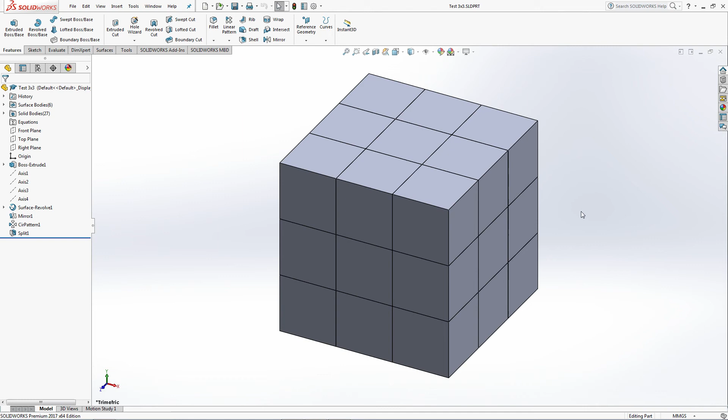So I have a test 3x3 right here, and this 3x3 is fully functional. I mean, I don't have any tolerances or fillets or anything, but each piece is fully functional. So I'm just going to delete everything. I could do a keep bodies, but I'm just going to do delete bodies.

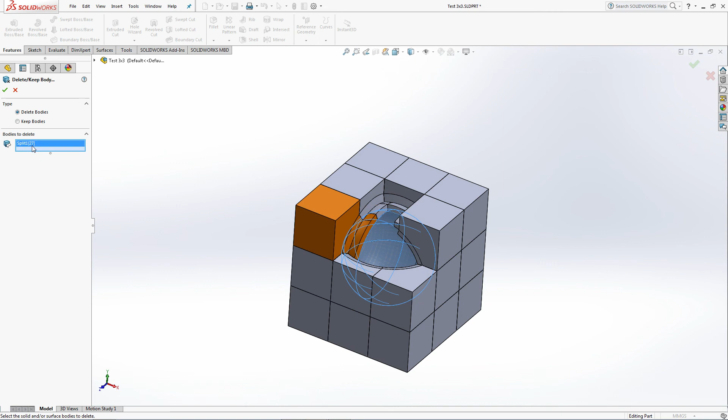Okay, so I'm just left with the four basic pieces of a 3x3. I will go save as STL. This one is the corner.

In Part Stacker, you always want to do dot, however many there are going to be in the puzzle. So there's 8 corners, and there's 12 edges. There are going to be 6 centers, so center dot 6. Great. And then there's obviously only one core, so you don't really have to put dot, you're just going to put core.

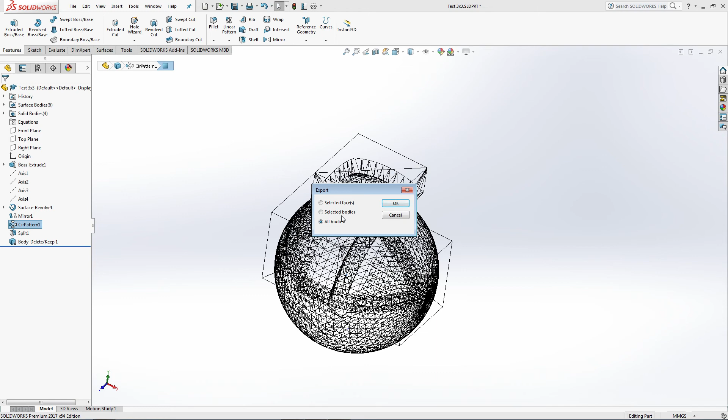Now, you don't really have to do all this stuff, it just makes it easier once I go into Part Stacker, which is where I'm going to go right here. So I'll import these 4 things. If you notice, they all have the dot number at the end of them. And when they open up in Part Stacker, look, 6 centers, 1 core, 8 corners, etc.

So here are the pieces in Part Stacker. I'm using a bounding box of 85 because I've tried this already, and I know that 85 by 85 by 85 works well for this specific puzzle that I made. I will generate the Sinterbox, but I'm going to delete it later, and I'll explain what I mean.

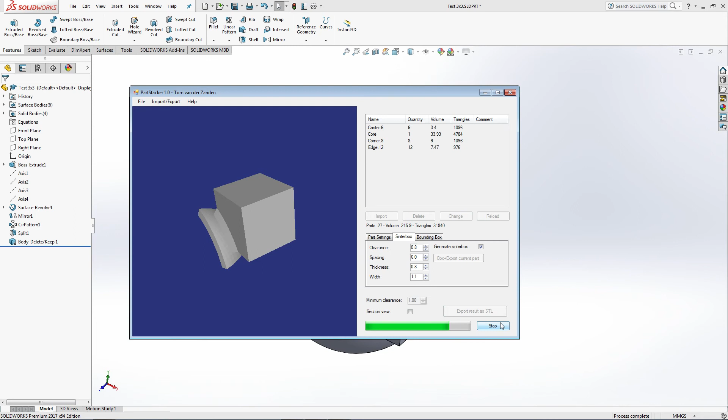So it just packs all these pieces here. Again, if you're watching this video, you probably already know what this is, and I don't really need an explanation, because I don't really see anybody who doesn't know how to design puzzles already watching this video. But that's okay, it's open to anybody if they want to. I just don't see why you'd want to.

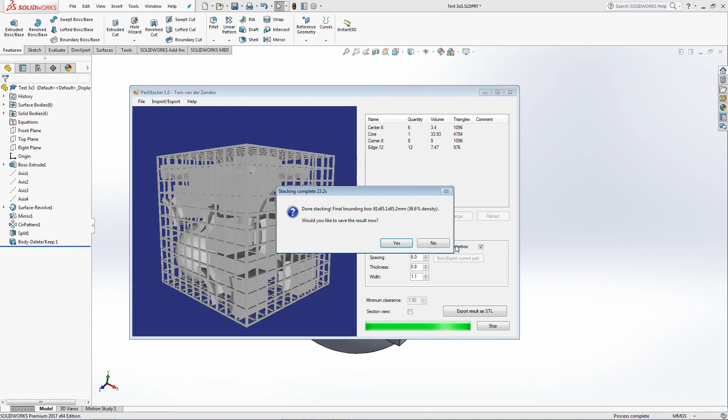So I'll save this as test 3x3 base Sinterbox. Just give a little bit of a descriptive name.

Let's go into, let's actually open this up in MeshMixer, which takes a surprisingly long amount of time to boot up, considering it's MeshMixer. I don't know, maybe it's a more intensive program than I can tell, but it takes as long as Solidworks for me.

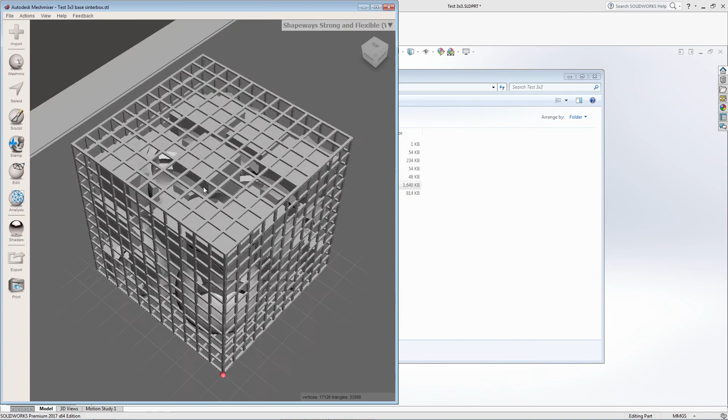So here is the whole puzzle that I just packed. So here's all the pieces inside the Sinterbox. Now, these Sinterboxes are incredible, and Tom Z's program is incredible for making Sinterboxes, but there's an issue.

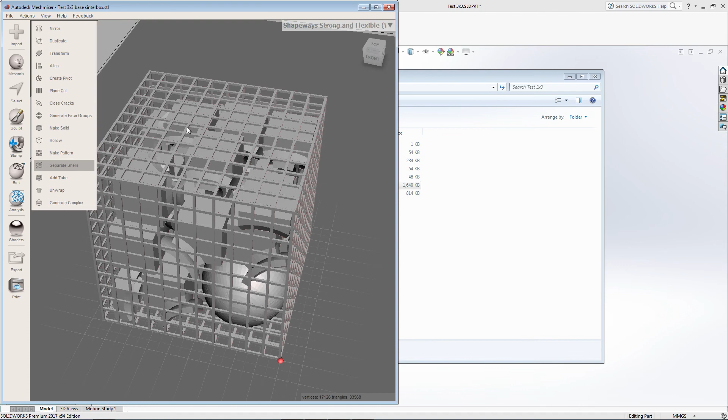So sometimes my prints, I think maybe the lid or one of the sides will not print with the rest of the box, or a couple sides will not be printed or something. That's all because I found out when I went into MeshMixer. I'll go edit, separate shells. I found out that every single bar on the Sinterbox is actually its own body, sort of.

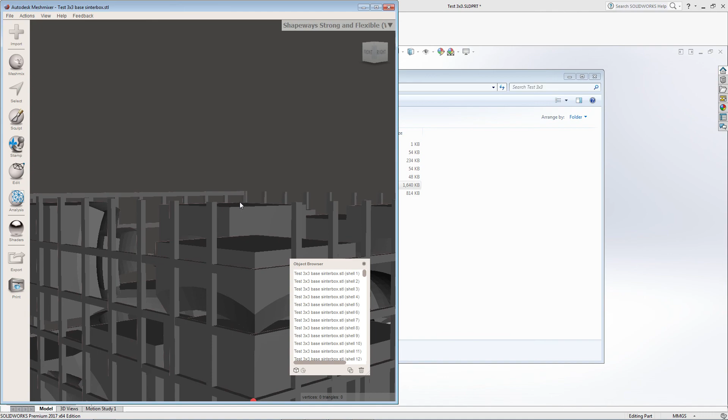I mean, they're not called bodies when you're talking about STLs, but in SolidWorks lingo, it's its own body. So what I normally do is I go in here and delete every single one. This is not exactly a quick process, well, it can be quick if you do it like I do, coming at it from the side and just spamming your delete key and your mouse, which is what I'll do right here to all 6 sides.

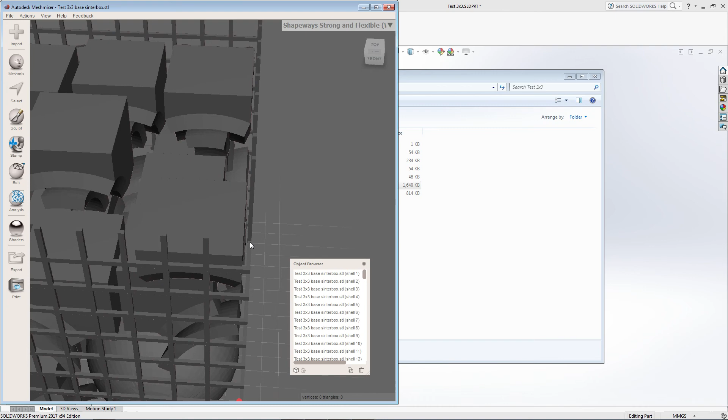And then what I'm going to do is take this model, after I'm finished doing all this, import it into SolidWorks. I'm going to remake my own Sinterbox, but this Sinterbox will all be one piece.

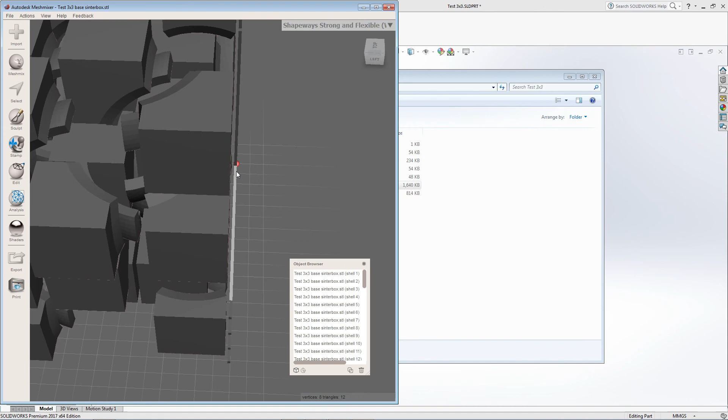Now, you might be asking me, or thinking towards me in your head, why are you not just combining these shells, I think they're called shells, into one continuous thing? Like do some sort of Boolean operation, maybe in Blender or something.

Well, I mean, I don't really know how to use these programs too well. I don't know how to use MeshMixer too well. I know about 2 tools in MeshMixer, and they are edit, separate shells, and then combine them back together once I want them combined together.

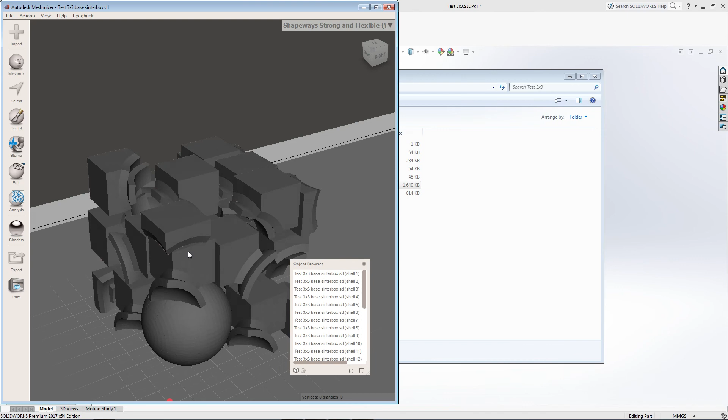So I don't really know how to do that kind of stuff. I kind of like making my own stuff. I know how to use SolidWorks pretty well, so I prefer that.

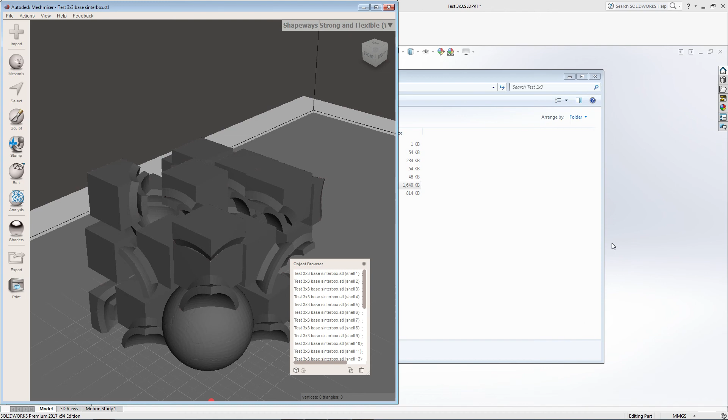Plus, you can make it equation driven in SolidWorks, so you can actually just type in a few numbers if you want. If you set it up the right way, you can type in a few numbers and then get it to generate a Sinterbox for you. I'm not going to do that right now. I could do that some other time. It sounds like a fun project, but I will, in SolidWorks, open.

I'm actually going to open this. I didn't save it in MeshMixer, so I'm going to open it just like this. I mean, it's still there in MeshMixer. So what I do is, and this is not exactly the quickest process, but it's definitely good.

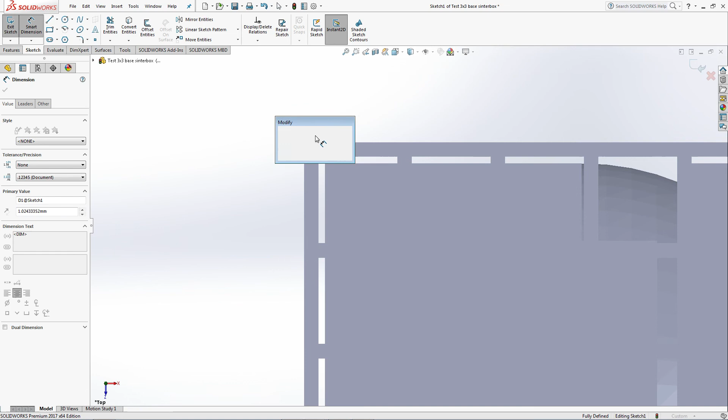I'm going to draw a square. I'm going to make it equal. I'm going to dimension it to be 1.1 millimeters. Why 1.1 millimeters? Because that's what the Sinterbox is.

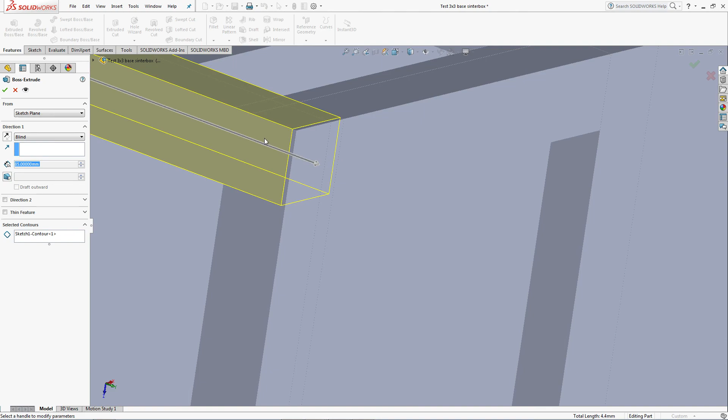Then what I'm going to do is I'm going to extrude it. Oh, I didn't set up that hotkey. I'm going to extrude it out towards the end. I'm going to make sure it lines up right inside of that last beam. That'll be important for later, but it doesn't really matter right now.

Let's go on the right. I don't really have to dimension the rest of these because it can all just be geometrically done.

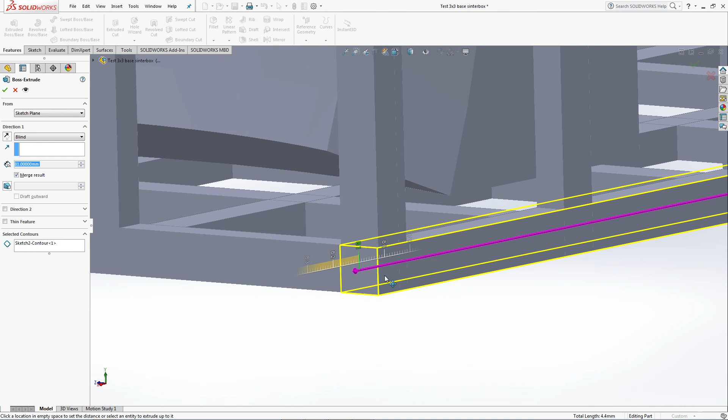Yeah, sorry if this video ends up being boring, but hey, if you came to my videos for excitement, you went to the wrong place.

Which 2 did I do so far? I did those 2, so I need to do the front plane.

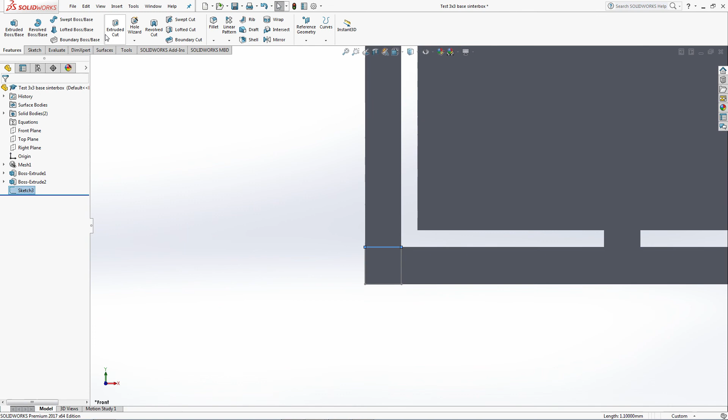I do have some hotkeys set up in SolidWorks. Most of them actually are from Matt Bonner's videos, that SolidWorks puzzle design SolidWorks tutorial videos that he came out with back in.

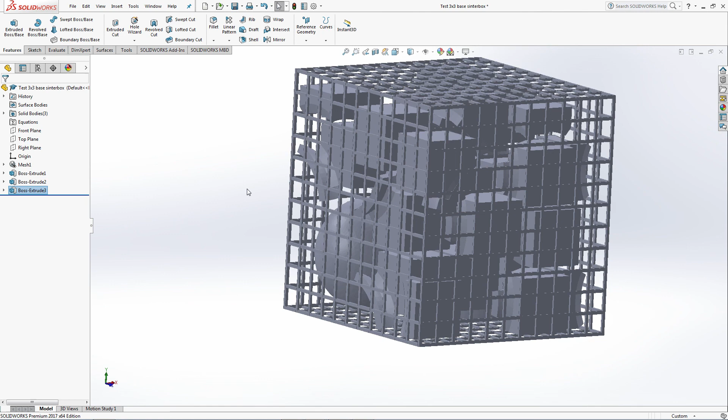Oh, make sure it's not merged. He came out with back in 2015, I think. That's when I first learned. I actually first learned how to use SolidWorks from him, which is pretty cool. I really appreciated those videos when they came out.

Yeah, so a lot of my hotkeys are from him. A lot of them aren't. I just, you just set up your hotkeys over time.

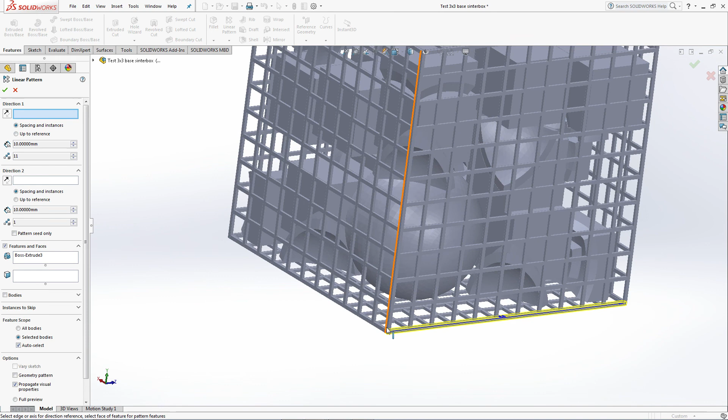What do I want to do? I want to do a linear pattern. This linear pattern is going to be in the, let's do it in the vertical direction. I guess it's only vertical depending on your reference frame.

I believe it should be 12, but I will probably be wrong. And I just want to find out what's the spacing here. So 3, 4, 5, 6, 7, 8, 9. Okay, so yeah, so that was right.

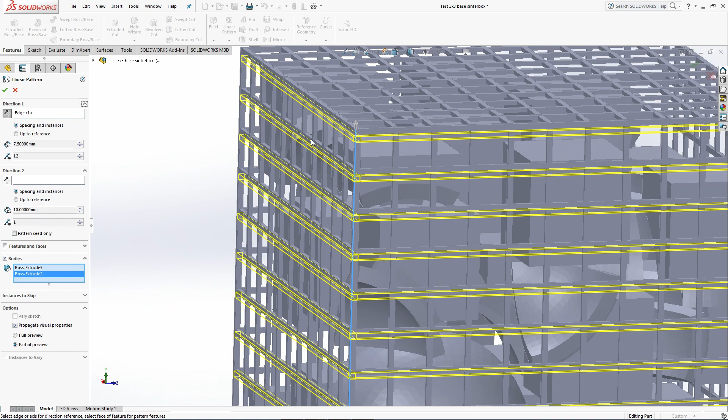7.5? No. And then you just kind of do the little tweaking. It's annoying, but I find it rewarding. If you don't find it rewarding, feel free to not. But I like it.

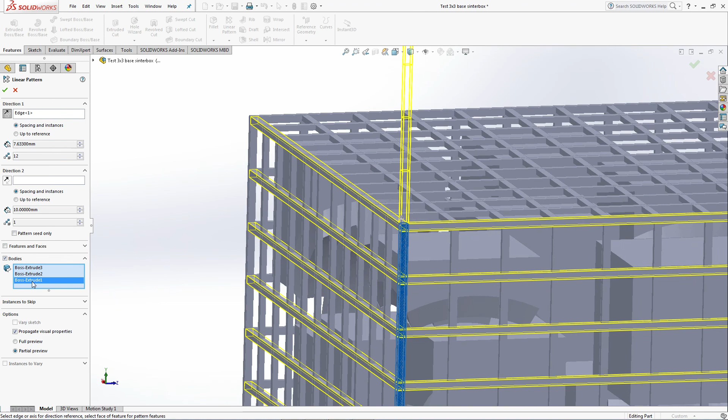That looks good. It's good enough, I guess. Not that one, though. Cool. So I'm going to remember 7.633 because that will be useful later.

Okay, so far I have all these. Basically what I'm going to do is I'm just kind of putting all these bars. I just want to remake them. Put them here. I don't know what I'm trying to say.

So I did the Y direction. Let's do one in the X direction. So let's do a linear pattern in the X direction. Nope, that's not a direction.

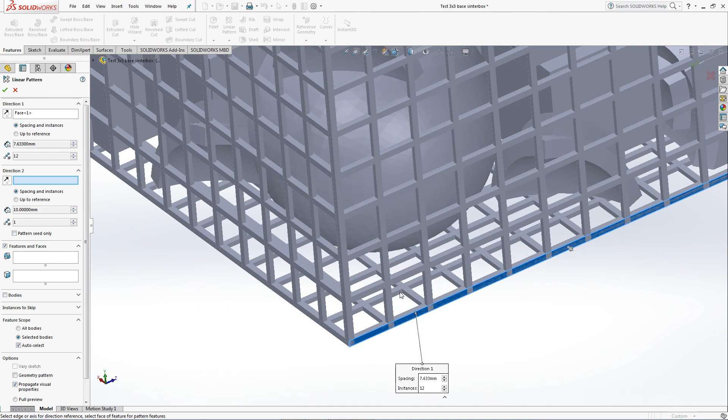X direction. I will choose this beam and this beam. Oops, not direction 2, direction 1. Like that. And it just so happens that it is exactly...

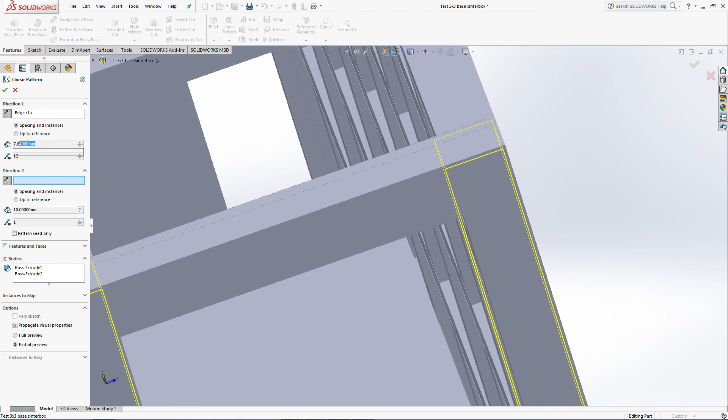Is it enough the same? Do I care? I happen to care. 4. 5. Nope. 4, 5. Perfect.

So now what I've gotten so far is all this. Great. And then you just keep going.

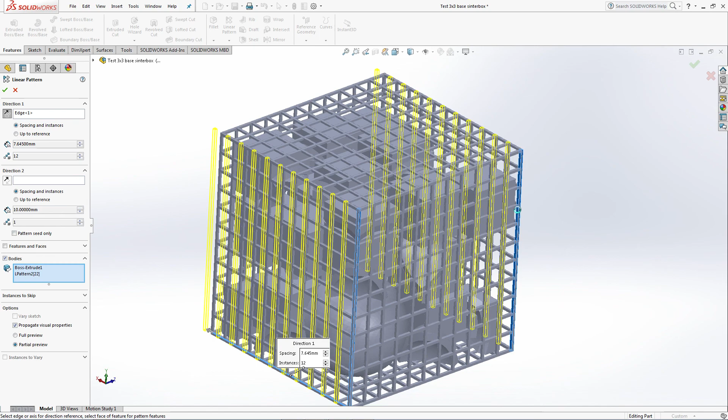So let's do an X direction. Basically, it's going to end up being, there's going to end up being 5 of them. 5 linear patterns you have to do.

This one is going to be a little less, maybe 7.3. I'm going to forget the first 2 numbers now. I'll have to go back and check. That's probably good.

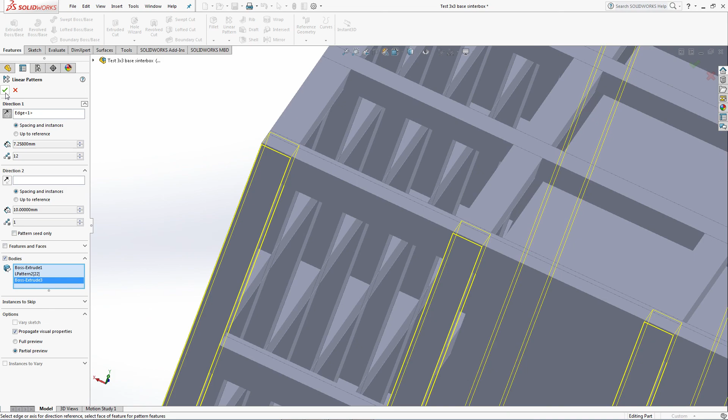Great. And then I'll do a linear pattern. Let's do Y direction again. So what am I left? What do I have still? Okay, so I have yet to do. I feel like I missed something somewhere.

It's a learning experience, let's see. Oh yes, that's true, I did. In this one, I missed one of the beams right there. Perfect.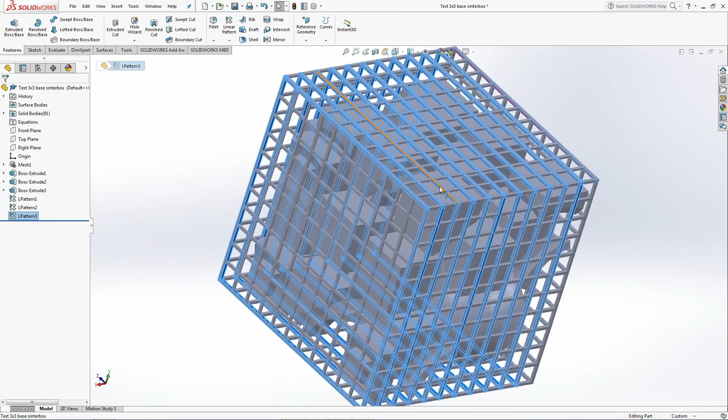Yeah, that looks good, because if I do Y and then Z first, then X third, you only do X once, just because of how the geometry of this whole thing works.

So let's do a linear pattern in the Y again. Let's choose Y direction. Oh no, I need to know the first number. First number was this.

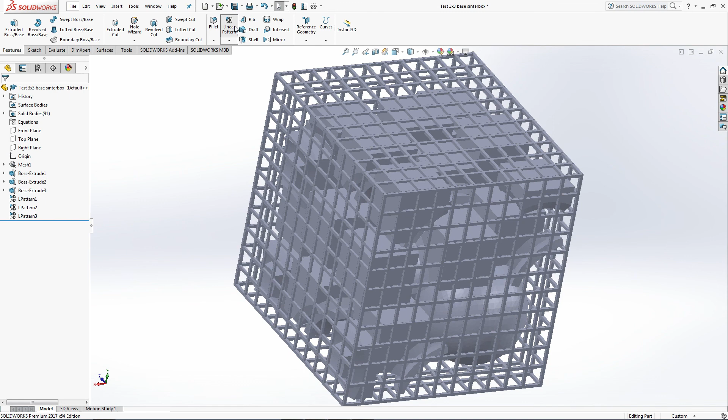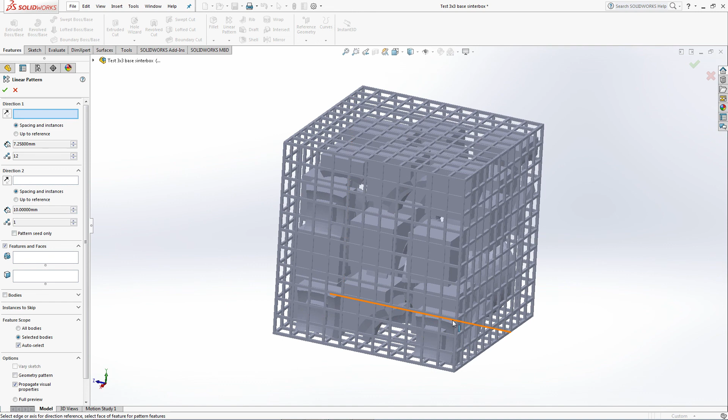Linear pattern, Y direction. Which bodies do I need? I need this body, but opposite. Is that it? Nope, oh, I exit. Okay, let's try that again. I think it might just be this body that I need, but we'll see.

It would be easier if I just hid this. That would be easier. Yeah, I was missing something.

Oh, and also this doesn't need to be 12 now. It needs to be 11 because this beam is already here. If you notice, there's that weird overlap, but that'll get sorted out later.

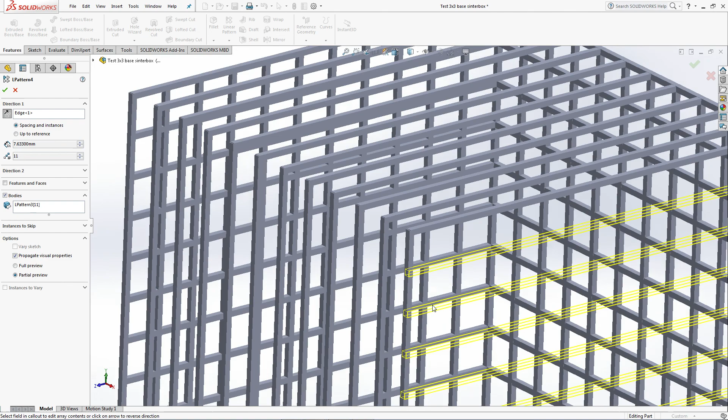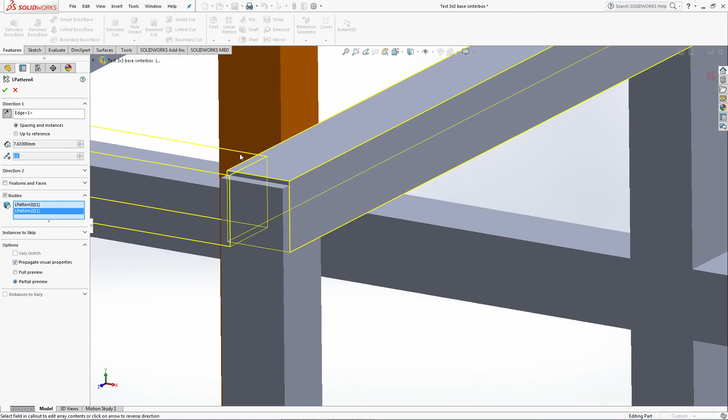And then also this one goes up. Great, and then as you can see, we're only going to need... Oh, that's too bad, okay maybe I'll... Are these perfectly overlapping? Oh they are. Beautiful, okay that works, and now I just need one more linear pattern in the Z direction.

So again, this whole thing is a... I'd say it's a decently tedious process. Oops, I need to check the Z one, I don't remember it. It's a decently tedious process, but if you've seen any of my videos, you might know that I like tedium.

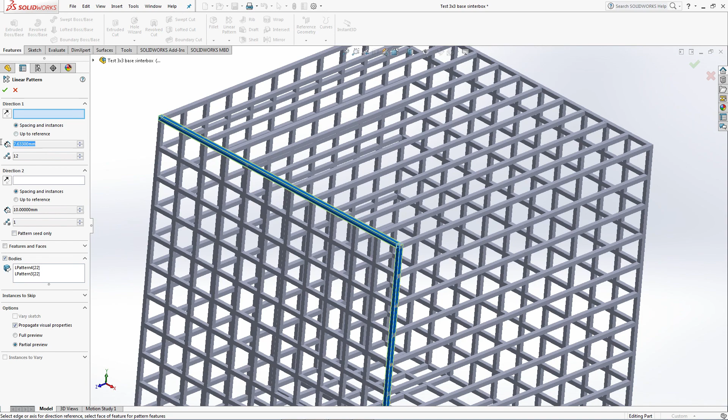But yeah, it's pretty rewarding I think, because I make my own Sinterbox and my prints come out nice. It's especially good actually if I don't use Part Stacker, which is sometimes. I sometimes just kind of do like an explode of my puzzle and then move the pieces into proper places. It gets them really compact in there. But that's for another time if anyone cares.

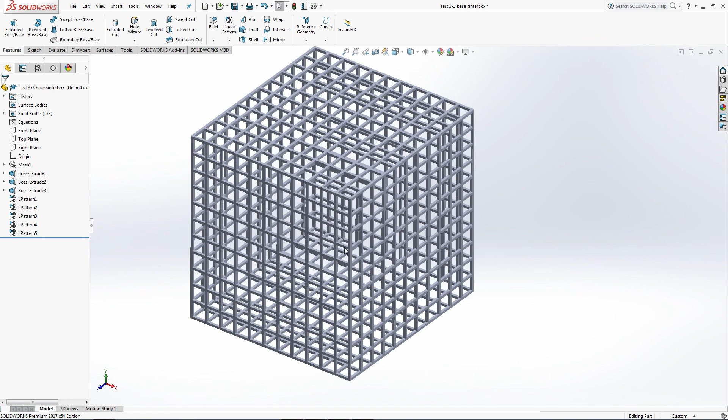Now I'm going to combine all these bodies. I'll just select them all and combine, I have a hotkey for that. So after this is done loading, because my computer is 4 years old, then...

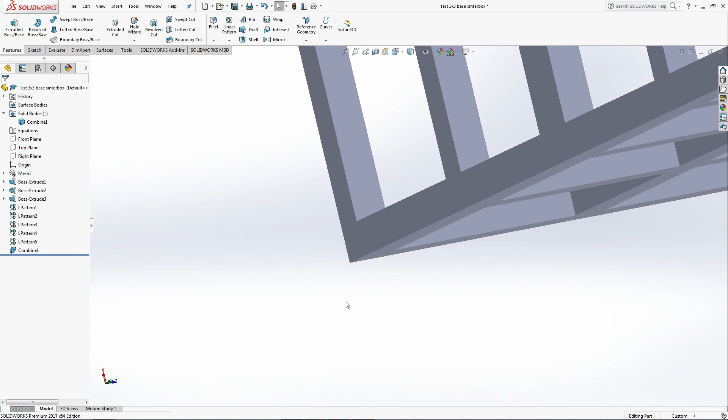If you notice, these corners are good now. There's nothing wrong with the corners, except for one corner. The corner that is at the origin is obviously good, kind of by definition, and then the other corners are going to be good. But the one corner that isn't good is the one that's directly opposite from the origin, so there's going to be a little chunk cut out.

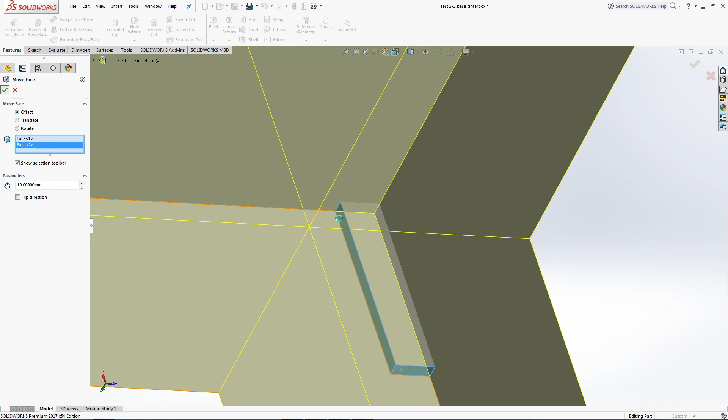If you care about that chunk, I happen to, then I would use a move face feature, select 2 of these faces, and then it looks messy, but when you press check, you're good. So now this is a perfectly good Sinterbox.

So let's save this as a solid part file. Let's just call it Sinterbox.

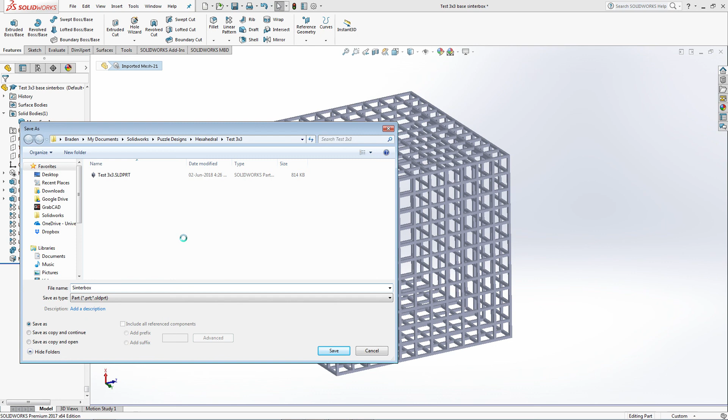And then after I do that, I'm going to delete the mesh that we started with. I'm going to save this as an STL, just call it Sinterbox.stl. And there it is.

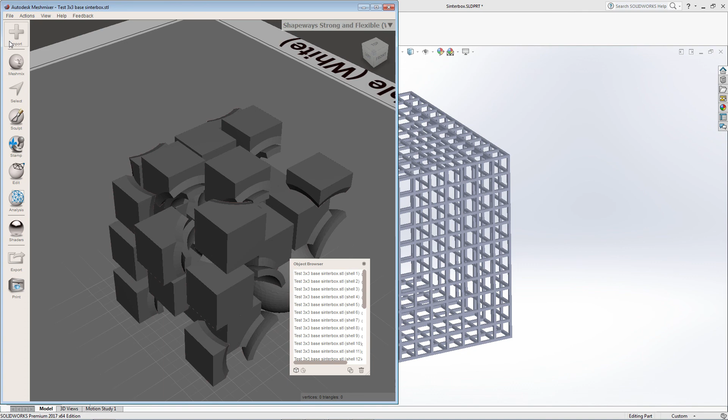Okay, so now I'll go back into Meshmixer. So now I have my de-Sinterboxed puzzle. I will import the Sinterbox.

And here's a really interesting point: because we built this Sinterbox right on top of the existing puzzle, when I put it back into Meshmixer, oh look, it's right on top of the existing puzzle. It's perfect.

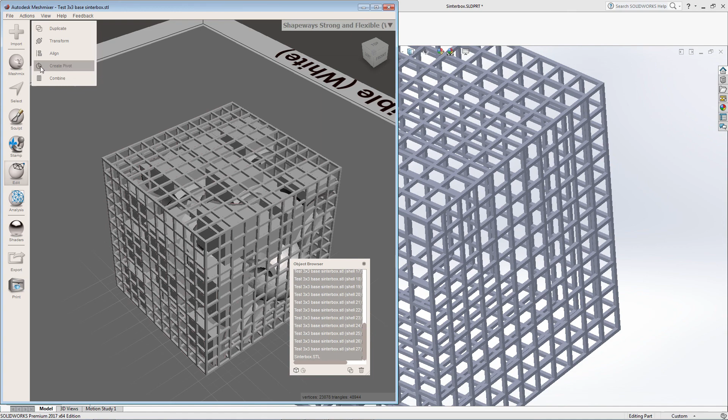So now I'm just going to go in, I'm going to select all these, I will combine them. They end up getting colorful, you know, why not? Let's also save this, let's call it combined. And then let's export as...

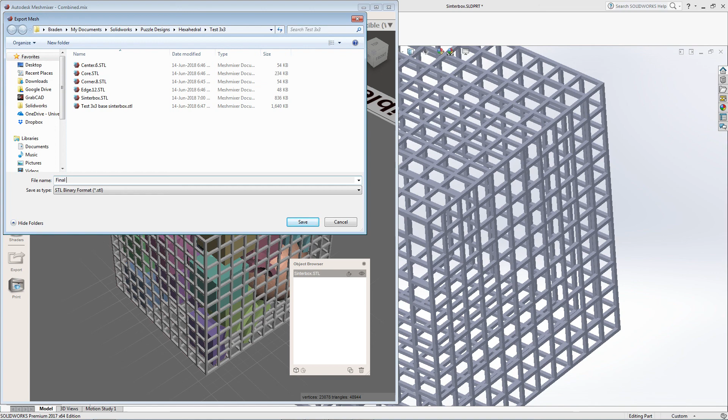final test3x3.stl. So if I exit that, if I go back in here, now I have my final test3x3.stl, and it has a fully solid Sinterbox that is now one piece.

I actually don't know if this is more or fewer triangles. I don't know if the file size is different, actually we can check that right here. Okay, so the file size is actually considerably higher. And it's for a reason that I don't really need to explain here.

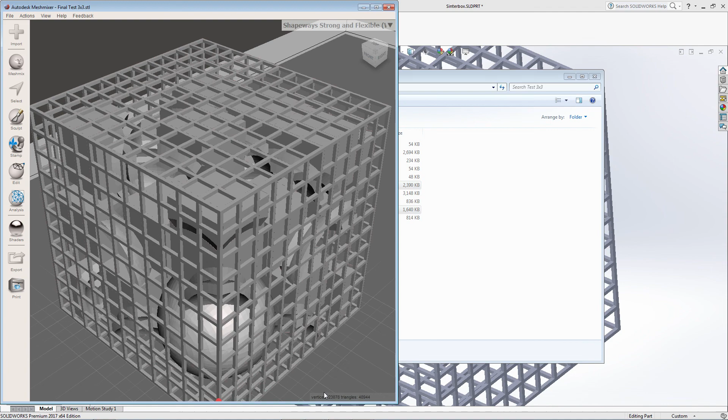If anyone cares, they could ask me. But the file size is actually higher in this new one that we made, even though it's fewer parts, or fewer bodies. But it prints nicer. So if that's something that matters to you, it is something that matters to me, then this is something good to do.